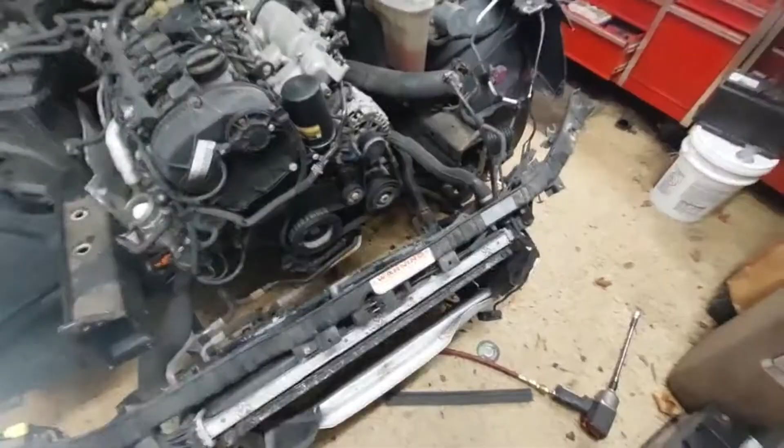Alright guys, as you can see, that is service position. You can see I left the impact bumper on, but having the headlights off did make it much easier. I have done this in the past with the headlights on, but I'm always fighting with the fender and the way it's coming up and out. For the few seconds it really took me to get the headlight off, it's well worth it.

From here I'm going to start taking the front of the motor stuff off. Obviously the serpentine belt, the electrical connections, get this pipe kind of loosened out of the way, get my balancer off, and take off my lower cover and my upper cover so I could see what the timing chain situation is.

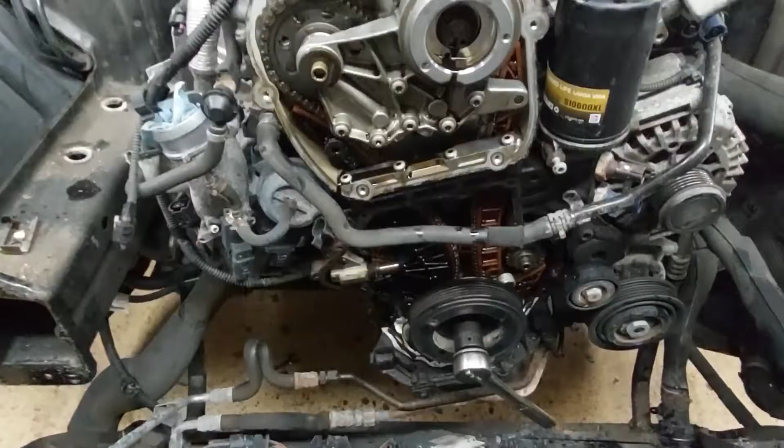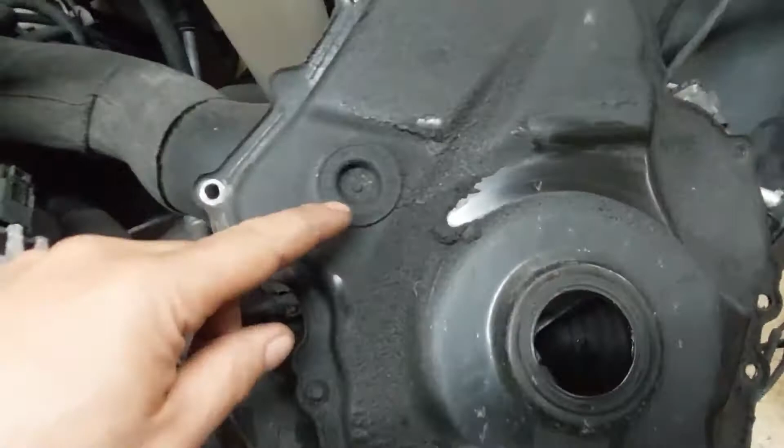So I just wanted to point out the timing chain, checking your timing chain for chain stretch, because that's basically what has caused this engine to fail. Audi and Volkswagen both put a plug in the front of the timing cover. It's an inspection hole, and behind this is the timing chain tensioner.

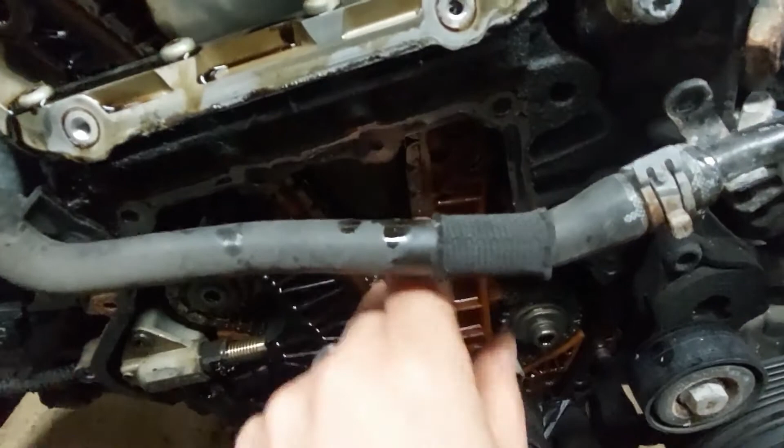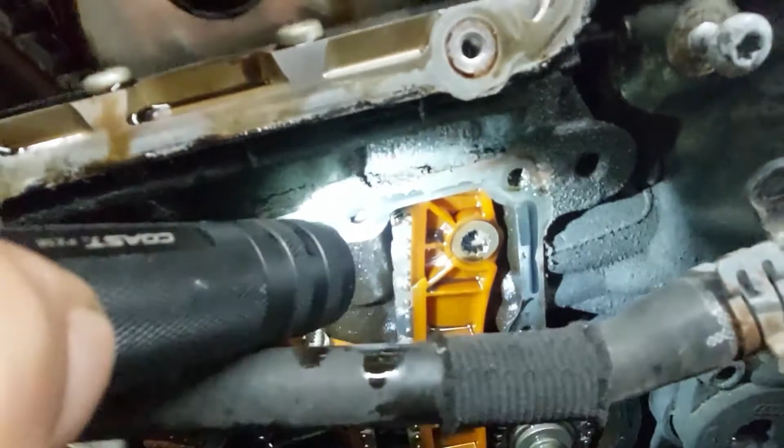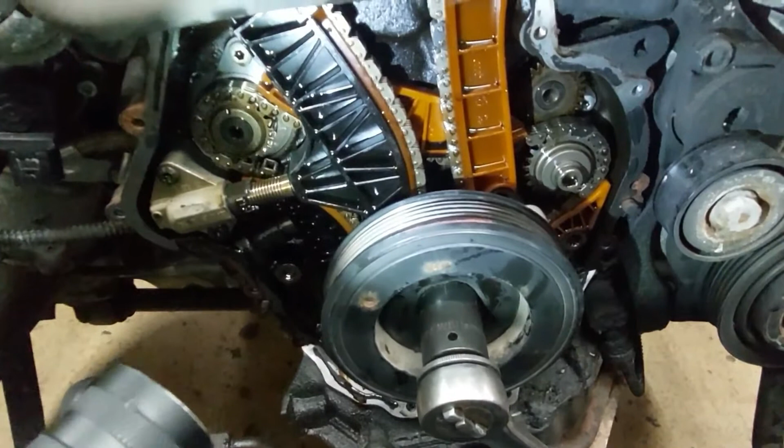Like I said in the beginning of the video, there is an updated version. This happens to be the updated version of that tensioner. So what I think caused our issue here is my guide here - I don't know if it shows up on camera, it's not really showing up, let me get a little light on here. So my guide here is broken. I don't know if that's a result of the tensioner being overextended or just wear in the guides. I'm sure once I get these chains off, I'll be able to show that the guides are heavily worn, and that's what contributes to this chain stretch issue.

I'm sure if you're at this point, or even looking at this video, you have some kind of P code indicating that your timing is off, and that is because of chain stretch. There is a way to check it if your engine's still running, using a scan tool and a measuring value block, and it'll give you a percentage that the cam sensors and the crank sensor relate to each other. If you're within certain specs, your chain is okay. If you're out of those specs, it's probably a good idea to remove everything, replace your chain, replace your tensioners, and do that before you have a catastrophic failure like this.

Top dead center mark is not the top arrow you see here. It's actually, it might be a little hard to see, a mark right about here on the timing cover.

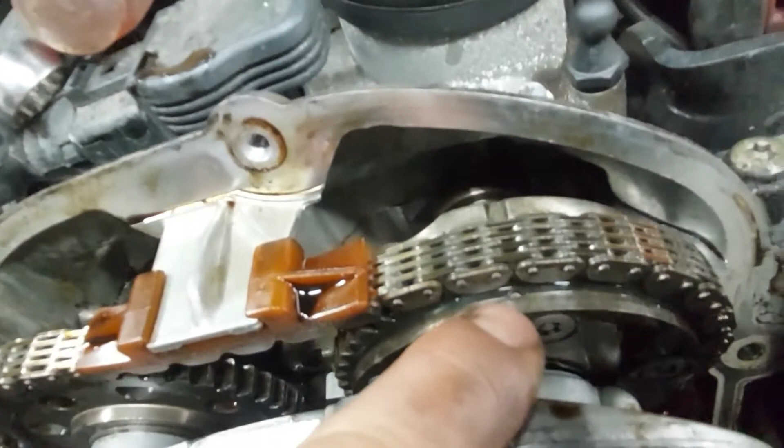It points to the edge of the timing cover where it meets the oil pan. So when you go to set your balancer, you want to make sure the notch on the balancer points to this mark here, not the mark up top. As for the marks on the cams, on the intake camshaft there's an arrow here, and on the exhaust you have this line here.

My tensioner was completely out, so my timing was off. I couldn't even crank the motor. The valve timing was off to the point where the pistons were hitting the valves. So I went ahead and got this back in time just to make sure I could rotate things. Just from rotating it by hand, I could feel this engine has absolutely no compression. So from this point, I'm going to remove the cylinder head and inspect to see which valves are damaged and take it from there.

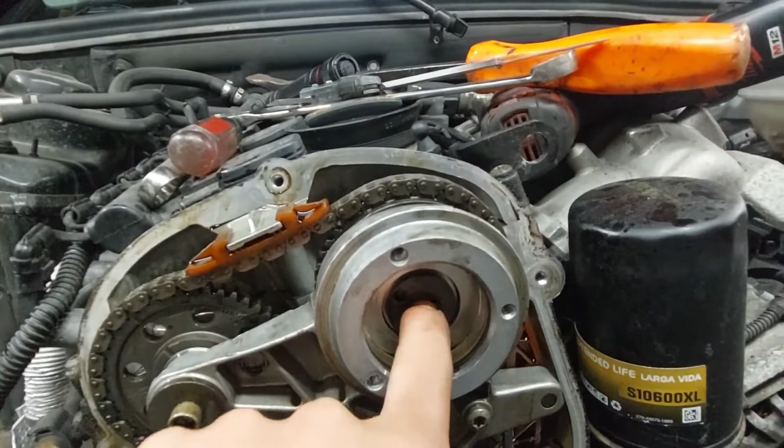If you are going to replace this timing chain, there is a special tool to remove the... gosh, I forgot what this is called. It's not necessarily a bolt, it's part of the cam adjuster here, I forget what it's called exactly. There's a couple, actually I think there's two different tool numbers. One has pins directly across from each other. As you can see, this one is offset. Let me get a light on there for you guys. You can see the holes are offset. You will need that special tool to remove that bolt.

Audi also shows special tools that once this - I'm going to call it a girdle - comes off, there are special tools. They look like almost hook feet that lock the camshaft sprockets so you can get this timed right and get the chain on. It makes things a little easier. I've done these jobs in the past, I've never needed them. It's a little tricky to make sure you get your cams in position without them jumping. You don't want them to jump because you can damage the valves. But keep in mind, you will need this tool to do this job.

All right, so from here I'm going to start taking things apart.

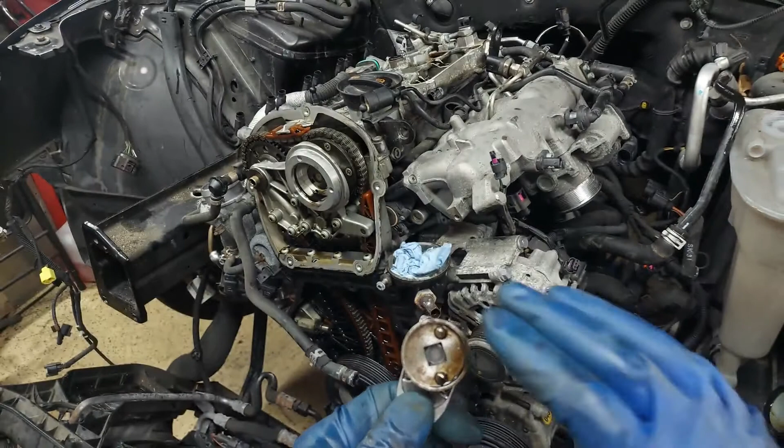Okay guys, I just wanted to show you the special tool you need to remove the cam adjusting bolt. There are two versions of this. The number is the same, the difference is the /2 and /1. I believe this is the /2, but I'll put the actual tool number in the description. This one I've made myself, just so I have it, but you can rent these, you can buy them. They're relatively inexpensive, but you will need this to remove that bolt.

Another thing I should mention, that bolt there is a left-handed thread, so to remove it you need to turn it clockwise. It's a righty-loosey, lefty-tighty bolt. But I'm going to go ahead and remove that bolt, the other support bolt for the cam bridge, and remove the cam bridge.

All right, there's the adjuster bolt. Just like I said, you can see a little better here the offset of the pins. The other tool number has them pretty much in the same plane, but this one is offset. Seems like most of the Audis I take apart have it offset, and a lot of the Volkswagens are in a line. I don't know if it's particular to the manufacturer or just the engine code itself. But that's it. I'm going to continue removing the rest of this bridge and update you guys soon.

Okay, another thing I should point out, in the cam bridge here is a screen. There it goes, now it's focusing. This screen a lot of times will get clogged and or blown out, and you can see this one is blown out. So when you have this off, be mindful of that screen - a lot of times it gets stuck in the hole, the oil galley hole here. Make sure you pull that out when you have this off, whether you have a damaged cylinder head like this or you're doing a timing chain job. Just be mindful, remove that screen - you don't want it to fall into the oil pan. It's so small it won't do any real damage, but just be mindful of it. It's not really a big deal to put it back in without it, so don't worry about it. Replacing this cam bridge is relatively expensive, but these are pretty notorious for blowing out the screens like this.

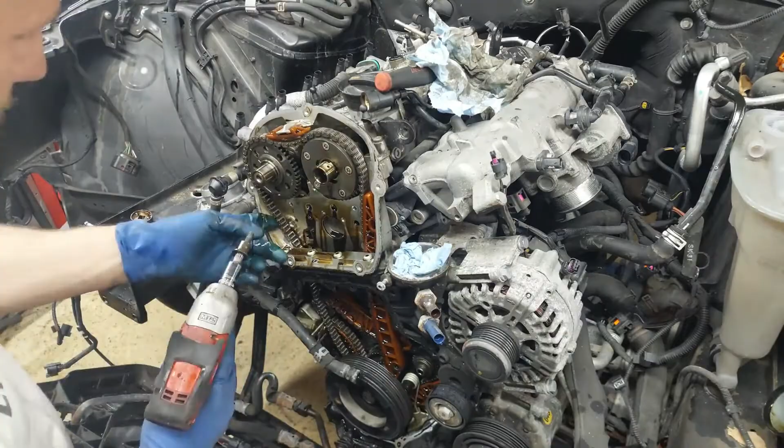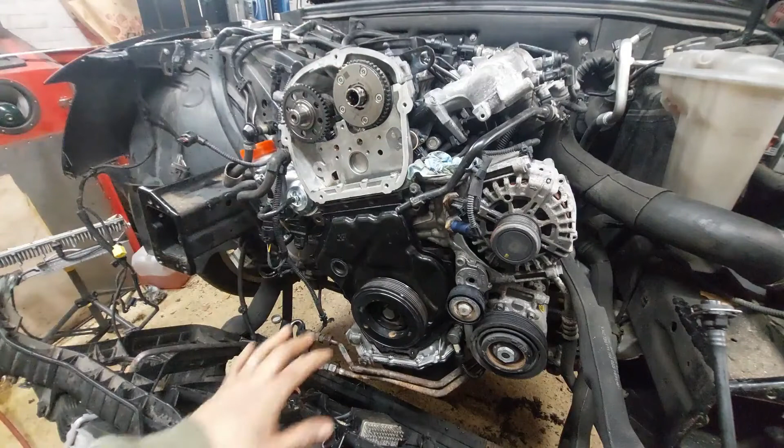Okay, so I have my cylinder head back in place. Everything is back where it needs to be. So now I need to set my timing. Since I had everything off and had the cylinder head off and had to reinstall it, I had my crankshaft set so it wasn't at top dead center when I reinstalled the cylinder head. So I need to turn my crankshaft so it lines up with the timing mark that's down here. This is the timing mark for the 2-liter engine. Don't go by the arrow that's on top. This is not correct, I don't know what it's for, but there's the marks on your balancer. You're going to line it up with this guy here, and that's pretty much initially what you're going to do to start your timing process.

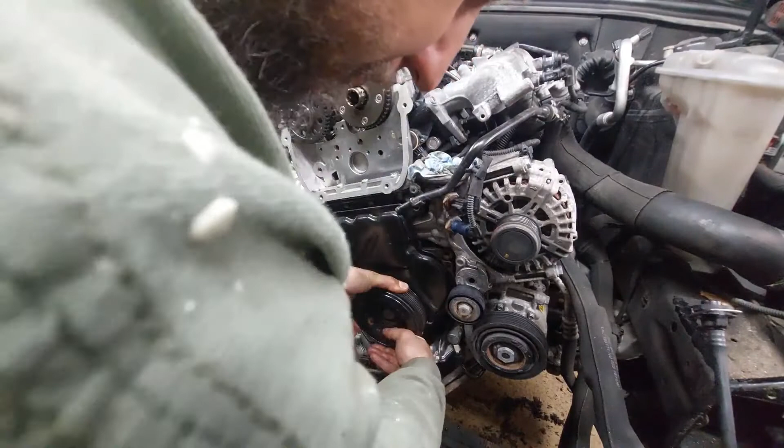Now my camshafts are basically in their top dead center placement. I will probably have to move them around a little bit, especially once I put my retaining tools in there. But I just wanted to point out right now that you need to set your timing. Make sure your timing on your crankshaft is set to top dead center. So just like that, timing marks pointing over here, and now you're ready to start timing.

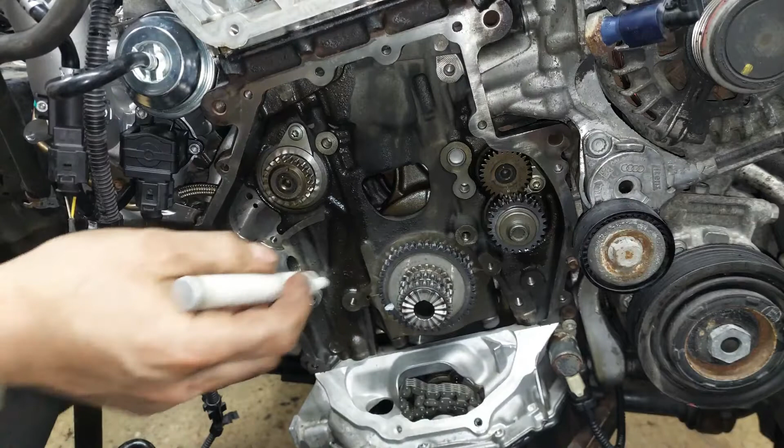Okay, so there's a few timing marks here that you need to familiarize yourself with. What I like to use is a little paint pen to mark up those marks so you can see them better once it comes to installation. So on the crankshaft is the arrow for your balance shaft chain. And then there's also on the water pump drive shaft here, on it itself has a single dot, and then on this little idler sprocket there are 2 dots. So you want to put the single dot in between the 2 dots there.

Let's see if I can show this. This is the single dot. And it's a little hard to see, but these are the 2 teeth where that needs to line up there. And then this is your timing mark for your balance shaft. So I'm going to grab the stuff, the chain, the guides, and the tensioner that goes here, and I will show you guys how to line all that stuff up there.

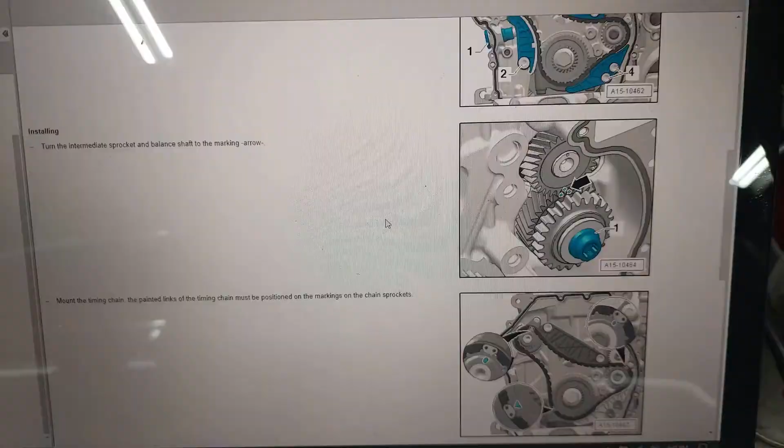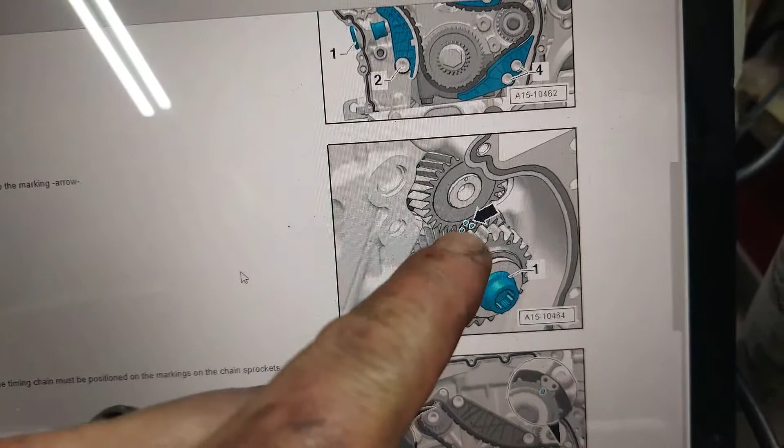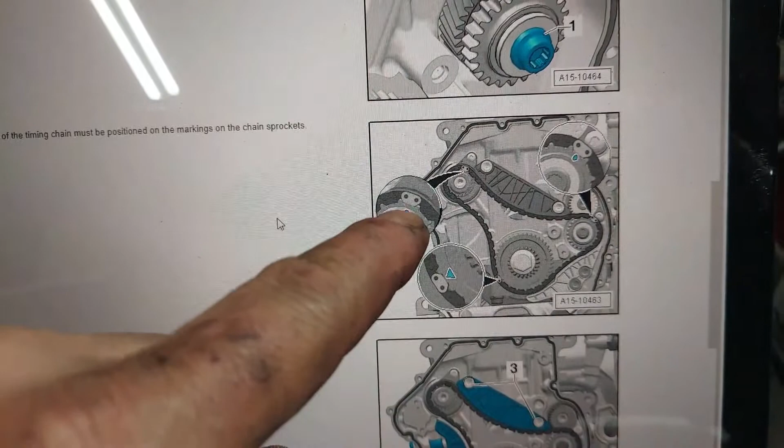Alright, so real quick, I just wanted to show you guys here's a picture representation of the sprockets. So you can see the 3 dots where the arrow is pointing to. Those are the 3 dots that you want to line up for that water pump sprocket. And just the mark I showed you there that's on the balance shaft, as well as the mark that's on the crankshaft sprocket. So basically what you're going to do is you're going to line up your painted marks on your chain with these marks here. Oh yeah, should point that one out as well, here on that sprocket, there's where the mark is on that sprocket as well. So basically you're gonna line up your chain with all your marks on there, and then you're gonna go through and install your guide rails and your tensioner.

Again, as always, I'll put in the description the torque specs for all of this stuff. But I just wanted to show you guys the timing marks themselves, because it's a little easier to see what they're talking about with the 3 dots there.

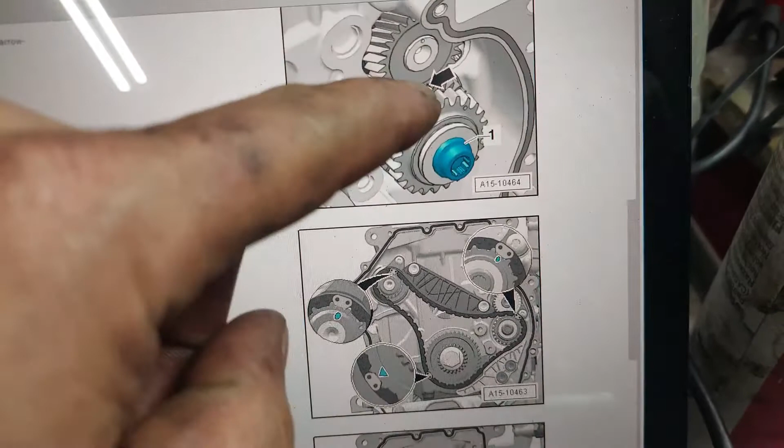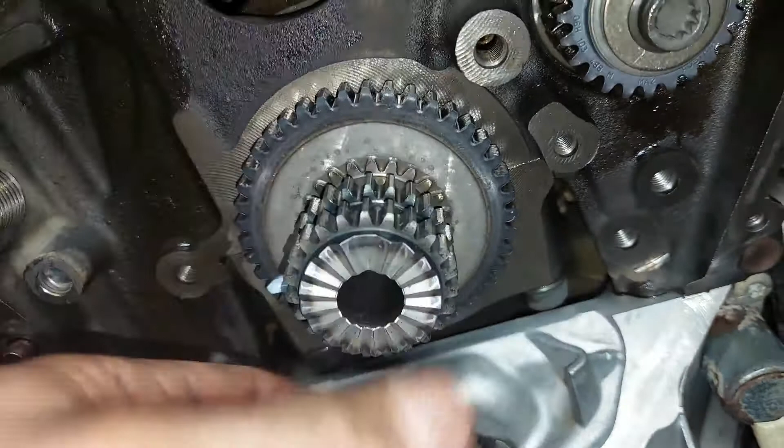I wanted to make mention real quick, the crankshaft sprocket here. As you can see, there's a flat spot on the crankshaft, and then there's a flat spot on the sprocket as well. You need to make sure that this thing keys in the right way and it sits flat. Make sure it's in all the way. There is a special tool, but basically it's just the bolt that goes through it to hold this to the crankshaft. Because if this thing comes out a little bit and say you reinstall everything there, your timing's going to be off, and believe me, I've done that before. So you want to make sure this thing is sitting in the flat spot of the crankshaft, sitting flat all the way against it.

And then, like I said, I'll usually use just the balancer bolt through here just to keep this in the whole time, because you can leave everything there. You can reinstall your timing cover to the back, and then when you're ready, put your balancer on, put your bolt back on, and everything should be okay. But you still have to be very careful with this, you don't want it to move around.

Okay, so my chain is in place. My marks are on, all of the marks on the sprockets there. Obviously there's a guide up here, tensioner here, and another guide that sits here.

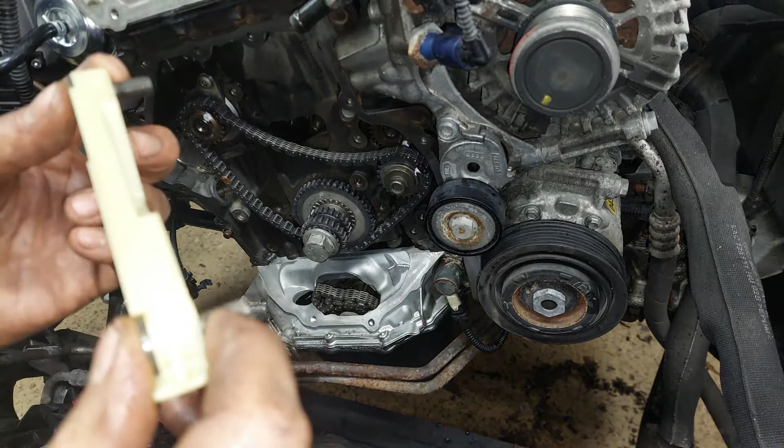I did want to mention that I clean these holes out with brake clean, blow them out till they're dry. Same with the bolts. You want to clean all the grease and oil off of them, blow them dry. And then I like to put Loctite on here, blue Loctite, on all the bolts before I torque these down to spec. So I'm going to get all the guides on here, the tensioner, everything, and when I come back I'll tell you guys what the torque spec is for this.

Okay, so I have all the guides and the tensioner lever in place. All, what is it, 5 of these bolts here, even though this one's a little bigger, they're all 20 Newton meters. So torque those down. Like I said, I put a little blue Loctite on all of those. So I'm going to torque these down, and then I'm going to push in or thread in my new tensioner.

The tensioner here, besides being a very large bolt, I'm using an 1 1/16 chrome socket because you need the clearance to fit in here. This gets torqued down to 80 Newton meters.

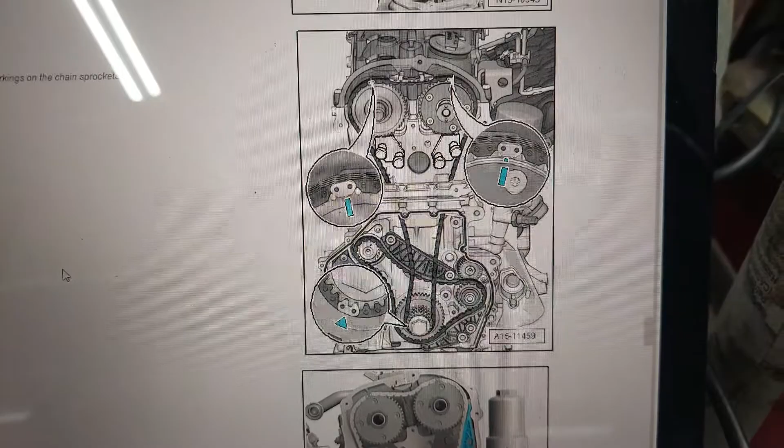Okay, so real quick on the program, this gives you a pretty good overview showing all the timing marks there, the crankshaft, the exhaust, and the intake sprockets. Basically, you're going to line up your colored links with all of those marks.

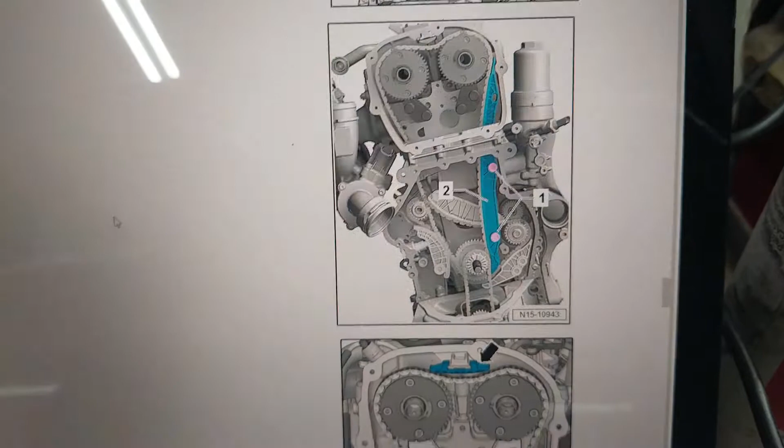Once that's on, you're going to install the guide rail here, and you're going to tighten those two bolts up. I'm going to assume those are 20 Newton meters as well, since they're the same bolts as we used for the balance shaft.

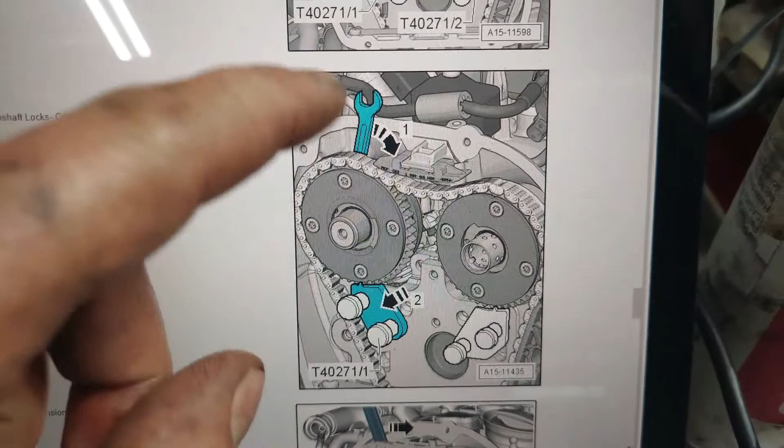Once that's on, you can install your new upper guide, and then this is where it talks about there's two different versions. If you have wrench clearance, or if you have just the sprocket with the holes. Let me see if I can show it. There you go. This is more like what I have.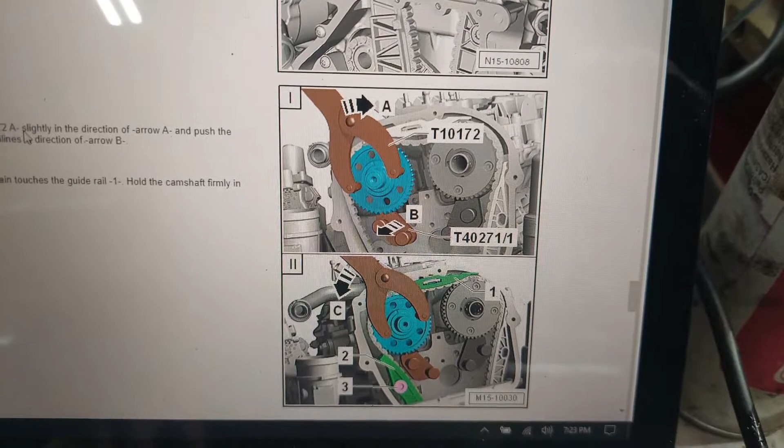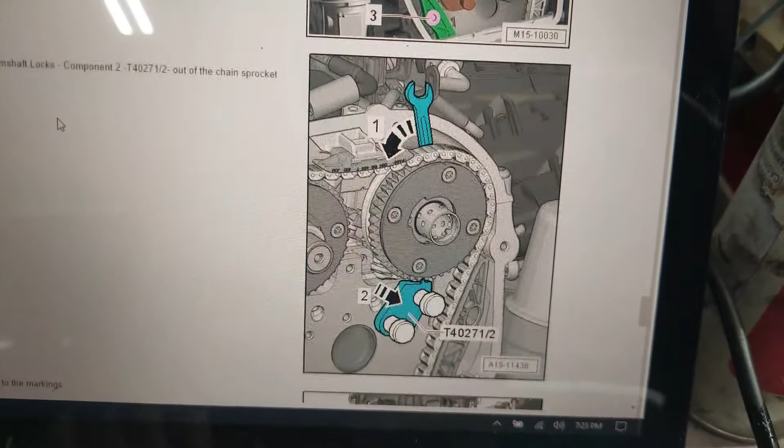Basically what they're saying is you just want to turn the exhaust camshaft just a little bit so you can back off the cam hold tool, and then you can install your tensioner rail, and pretty much this thing is in time then.

You can remove your intake hold tool, and then once everything is there, verify all your timing marks. You can probably then release your tensioner, and everything should be in time.

So I've got my guide rail in, tightened the bolts 20 Newton meters. I installed the upper guide rail, and then once I had this one in, I removed my holding tool from the exhaust camshaft, and I installed the tensioner guide rail here. Same 20 Newton meters for that bolt.

So now just want to verify, make sure all your colored links are lined up with your timing marks. Let me see if I can get a little light on there. See, I got that one on the crankshaft is all lined up. So everything now should be in time.

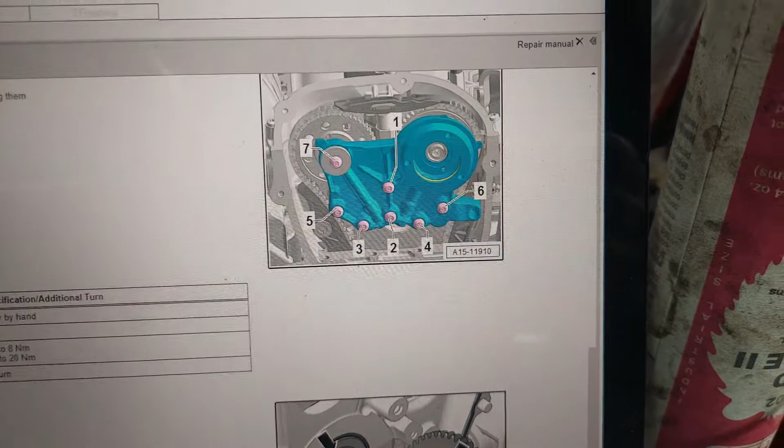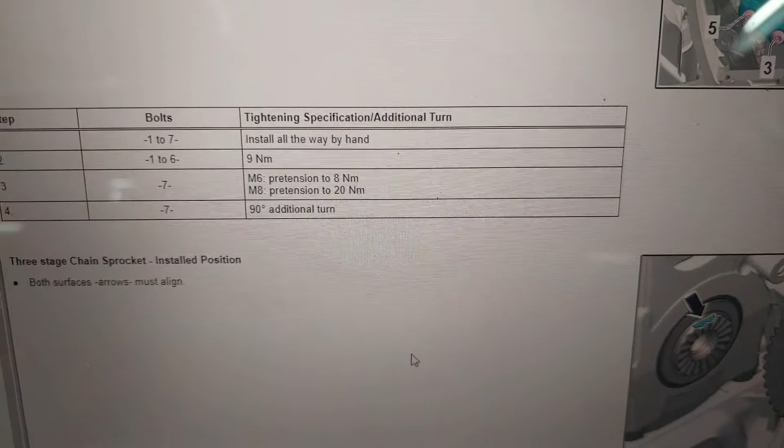Alright guys, so real quick I just wanted to show you the image of the cam bridge and the tightening sequence for these. So bolts 1 through 6 get tightened down to 9 Newton meters, and bolt 7 depends on the size. So if it's an M6, 8 Newton meters. If it's an M8, it gets pre-tensioned to 20 Newton meters. Either or, both get an additional 90-degree turn once it's tightened. So I just wanted to point that out before I install the cam bridge there.

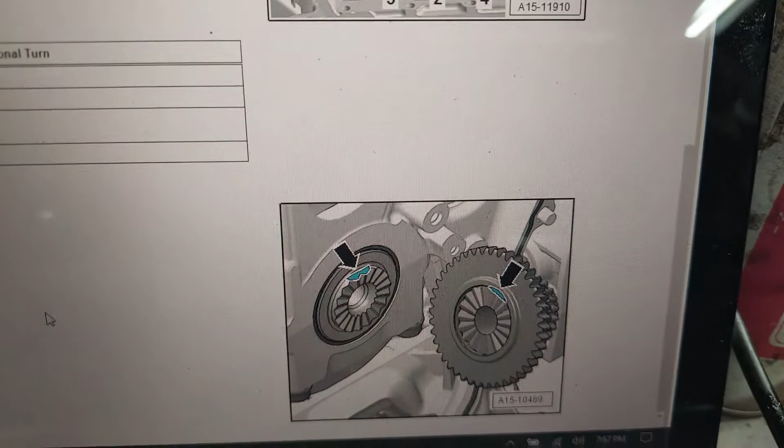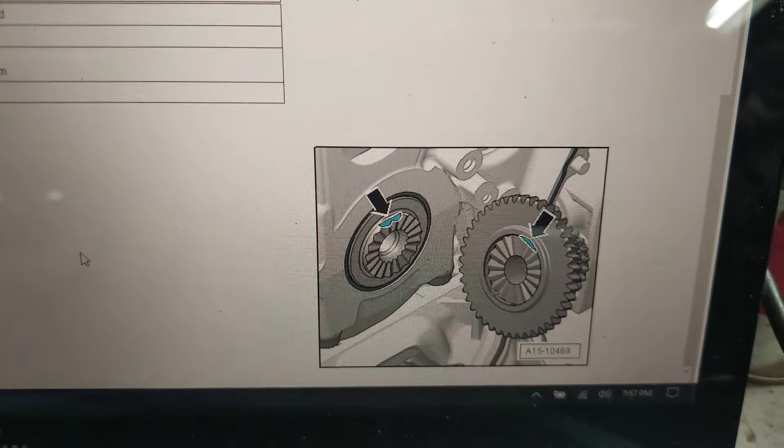I also noticed here, here's a picture showing that lower crankshaft sprocket, and it shows you guys the arrows that I was talking about, or the flat spots the arrows are pointing to, that need to line up when you install that sprocket. So it's very important that that is in the right spot for your timing to all be accurate. So let me grab my cam bridge and I'm going to start installing it.

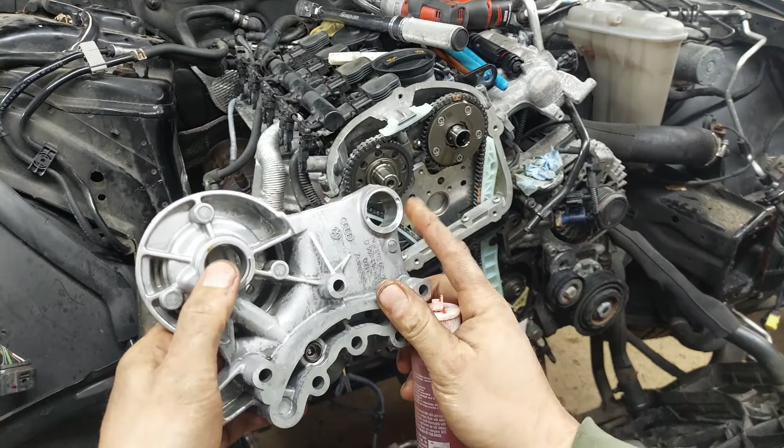Okay, here's my cam bridge. A couple of things to point out. In here, this is a bearing surface. The cam is actually riding in there. So you want to make sure that there's lubricant on both cam sprockets here where they're going to slip into this. Keep in mind these are machine surfaces, so this thing needs to be installed straight and even. If it's even slightly cocked, it's going to bind up. Don't force it, you'll damage these bearing surfaces. Pull it back, reset, and get it. It should slide on nice and straight. The other thing to point out, this pin here lines up with the guide rail here.

And I also mentioned when I was taking this apart, the screen that is in this cam bridge, a lot of times they blow out. So make sure that it's not in any of the oil galleys on the cylinder head. It's not a big deal if it's missing. If you're really worried about it, you have to replace this whole assembly. You can't buy just that screen. I usually just tear them out, make sure everything is nice and clean, and then just reinstall it.

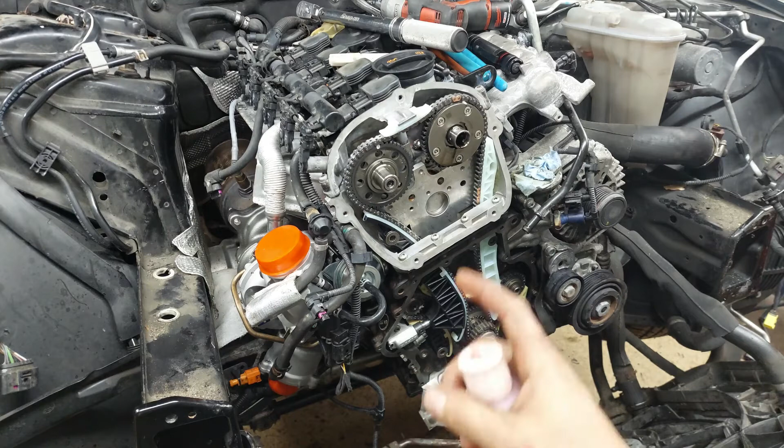So I'm going to go ahead, I'm going to put a little lubricant, my lubricant of choice here, some assembly lube, because it's going to be a little while before I fire this thing up. Not to mention, I had the entire thing apart, so it's going to take a little while to get oil to some of the critical areas, and I don't want a dry start. So let me lube everything up and then start installing this thing.

All right, so that's pretty much the basis of installing the cam bridge there. I had a little bit of difficulty getting mine sort of lined up just because the pin was hitting the guide rail, but it was nothing more than sort of just pushing this thing where I needed to go, and then everything sat down just fine.

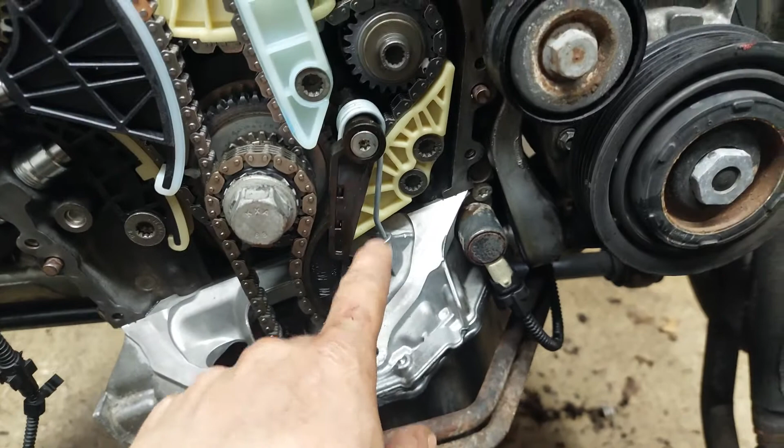Wanted to point out too, I don't know if I mentioned, installing the oil pump chain. There are no timing marks on that. You do not have to worry about timing marks at all. Just get it looped back over the crankshaft, and then same thing, I put a little Loctite on that bolt, tighten it down 9 Newton meters, and then pull the pin out that tensions the oil pump chain.

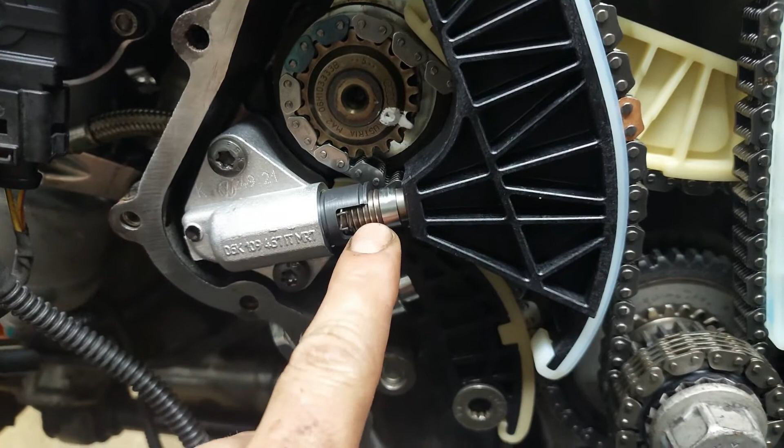One other thing I should mention, the tensioner itself has this little spring clip here, and what that is for is to keep the tensioner from pushing back in. So when the engine has no oil pressure at all, this thing is just spring loaded. So generally, once the tensioner is released for me and I rotate my engine twice, I'll then set this lock to the furthest back position I can. That way I know the tensioner is not going to go back any further, and it keeps a good tension on the chain, especially for my initial startup.

Like I said, everything was taken apart, so I expect to hear quite a bit of noise until everything starts to get oil pressure or oil volume.

The one thing I am going to do is remove all the coils and crank this thing over a few times to try to get oil into some of these areas before I really start it up. So at this point, the only thing I need to do before installing my covers is reinstall my adjuster bolt here. I forget what it's called exactly.

Remember, these are left-handed threads, so lefty tighty, righty loosey. That even confused me.

I'll put the torque for that in the description, because off the top of my head I don't remember what it is. But I'm going to install that, tighten it down to its torque specification, and then the top cover can be reinstalled with a new seal, or seals I should say.

And then I'll quickly show you guys the lower cover and how to apply the proper amount of sealant to that. Keep in mind, I'm going to leave my harmonic balancer bolt here holding that sprocket in place for now.

Once I have the cover on, I'll carefully remove this, trying not to rotate the engine at all. Put my balancer on and tighten that thing up as soon as possible. I want to make sure that the timing is not moving and everything is seated in perfectly.

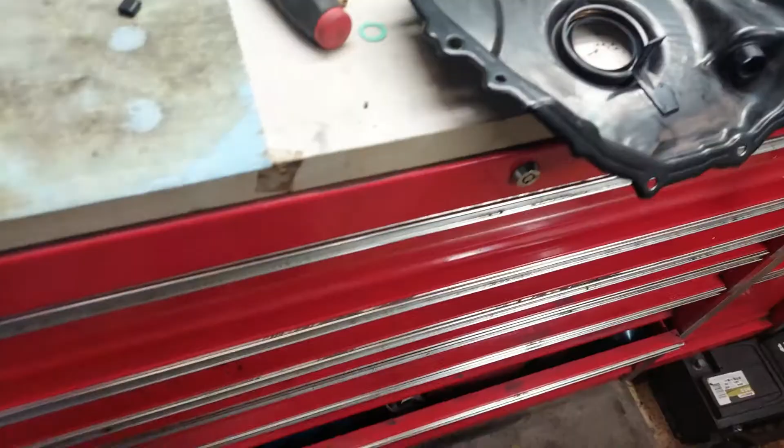Alright guys, before I install this lower cover, there are a couple of pretty interesting things that the program wants you to do. Now my cover has 8 bolts. I know there are 2 different versions of this, but keep that in mind when you're following along here.

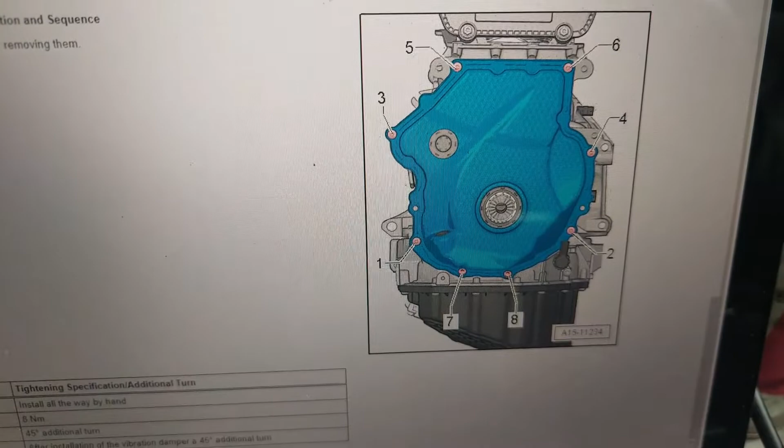Now, there's the cover. Like I said, I have 8 bolts in mine. After the sealant is put onto the cover, you have approximately 5 minutes to get this thing on and your bolts tightened down. What they want you to do is tighten bolts 1 through 8 by hand, just to get the cover seated down, and then tighten them to 8 Newton meters, followed by an additional 45 degrees for bolts 2, 3, 5, and 8.

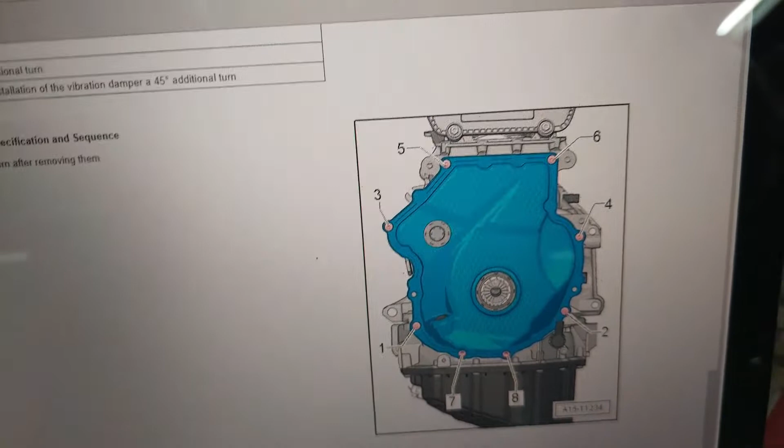And then after you install your harmonic balancer, come back and tighten bolts 1 and 4 an additional 45 degrees. Why they have you do it like that, I'm not sure, but they also recommend replacing this cover anytime you remove it.

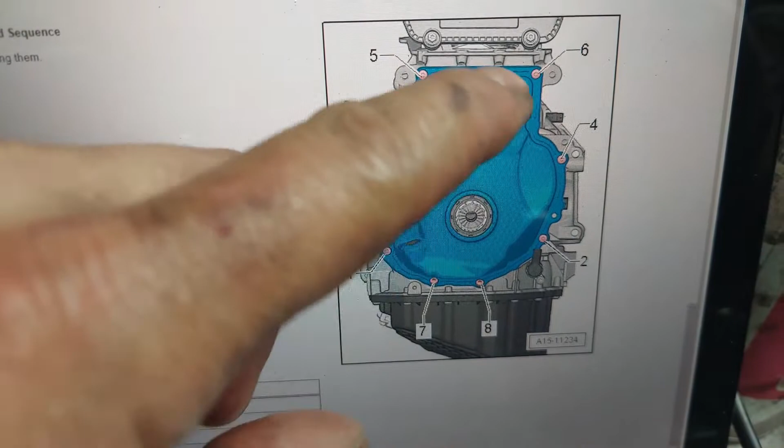I've never done that. When you remove this cover, obviously you're going to bend some of the edges a little bit. Just make sure you hammer those back straight as best as you can.

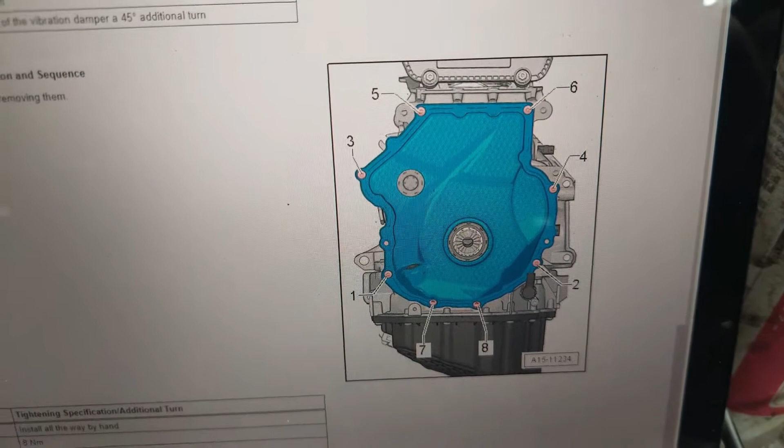The other thing I want to mention is on the sealing surface itself, they recommend a 2 to 3 millimeter bead of the same Volkswagen Audi sealant for the sealing surfaces. So I'm going to clean my surfaces on both the cover with some brake clean and a rag, as well as the engine, and then apply my bead of sealant.

I'm going to put a little extra in the corners here, for obvious reasons. You're meeting the oil pan with the engine block here, so a little extra in these corners—not anything excessive, just a little bit extra before we install the cover here. So let me go ahead and cut the tip on my sealant tube and get ready to install this.

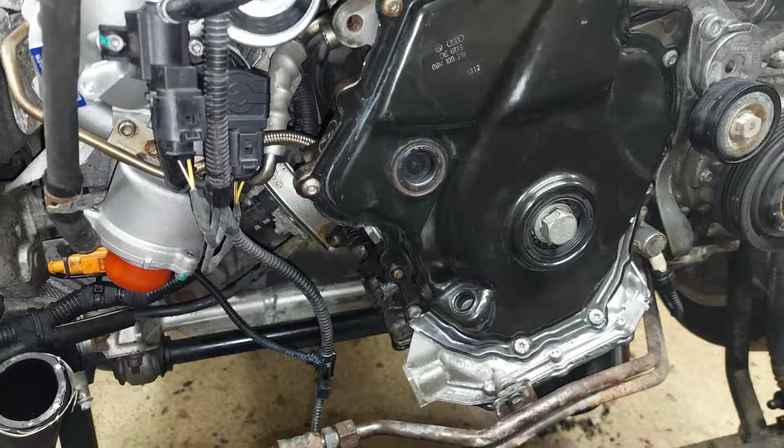Okay guys, as you can see, I've got my cover in place. I've got all the bolts that need to be torqued to yield set now, except for bolts 1 and 4. The rest of them—bolts 2, 3, and then 5 through 8—are all pre-tensioned and then torqued to yield to 45 degrees.

At this point, I'm ready to install my damper. But keep in mind, like I said earlier, you have to be very careful now while removing this bolt. You don't want that sprocket to fall off because it's keyed into the crankshaft. Once you remove that, there's really nothing holding it into place.

The other thing I want to mention is check the damper. Make sure that where the lip seal is going to be riding, there's no big groove or any kind of rust. Just clean that off and put a little lubricant on this thing—you don't want to rip up the new seal before it's installed. Also, be mindful of the larger triangle tooth here that is going to line up with the sprocket underneath this cover.

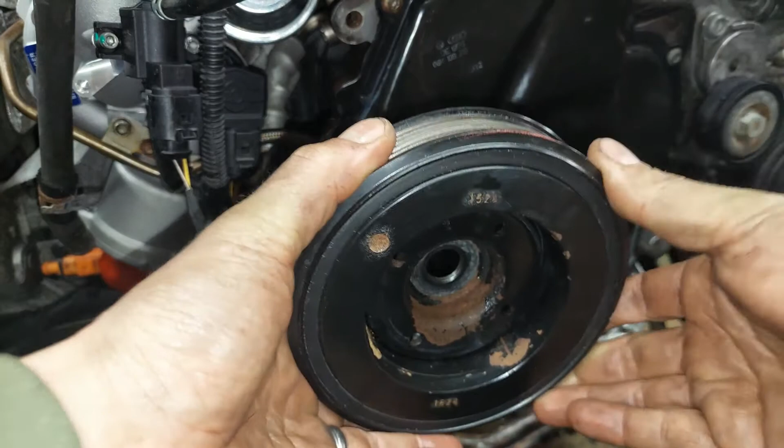So when I remove this bolt, I'm going to set this thing into place. I'm going to turn it back and forth a few times to make sure I'm in that groove. Once I'm in there, I'm going to install the bolt into the balancer.

Another thing I should point out, this bolt really is supposed to be replaced. There's also an O-ring seal on the back side of this bolt, so make sure you put a little oil on there before you install it. There's also 2 different size bolts depending on which one you have, and the torque is a little different. The one I have here is an 8.8, so off the top of my head, I think that's 90 Newton meters followed by a 90-degree turn to tighten.

Now, Audi does make a counter hold tool, which I do not have. It sort of goes into this mount here and then somewhere over there to hold the balance shaft, to hold the balancer while you tighten this thing down. So I'm going to have to get a little creative to be able to torque this and then my torque to yield. But I just wanted to point those few things out. So from here, I'm going to install my balancer, and then I'll update you guys where we are.

Alright, so last thing, my balancer is on. It's torqued to the specifications. So now all I need to do is tighten my two bolts, number 1 and 4, to their additional 45 degrees. Again, why Audi has you do that, I have no idea.

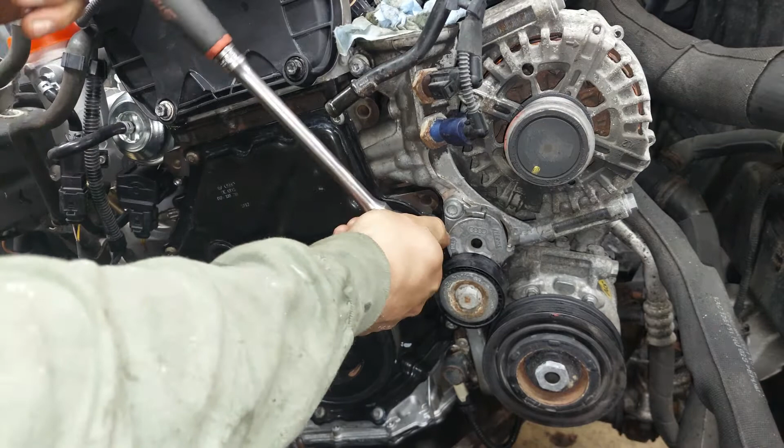Alright, so from here, all I need to do is reinstall my dipstick tube and pretty much finish reinstalling the rest of the front end of the car. But that's basically what you need to do for a timing chain setup on this particular motor.

4-cylinder 2-liter turbo. Like I said, it's pretty straightforward stuff. As long as you follow the sequence to tightening stuff down, using the chains with their marked links, marking your sprockets first, it's really not too bad of a job. Like I said, you can do the job without the two hole tools. I've done it many times. It's just a little tricky and you want to be careful. The intake camshaft in particular wants to snap back from where you have it, where it needs to be timed.

So that gets a little tricky. And then some of the weird things like the lower cover, way tightening those bolts - again, for whatever reason, I'm not sure. So that's pretty much it. All right guys, I hope I was able to make this somewhat easy to follow. I know there's a lot of steps, and it's sort of worrisome to make sure you have the timing right. I mean, it's a lot of work to get to this point. To do the timing, you want to make sure everything is done correctly.